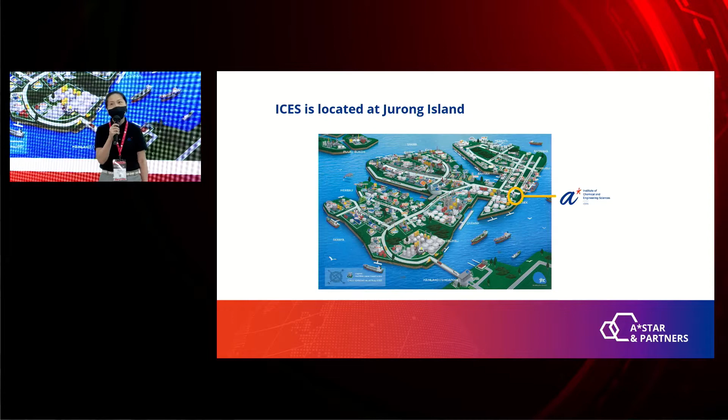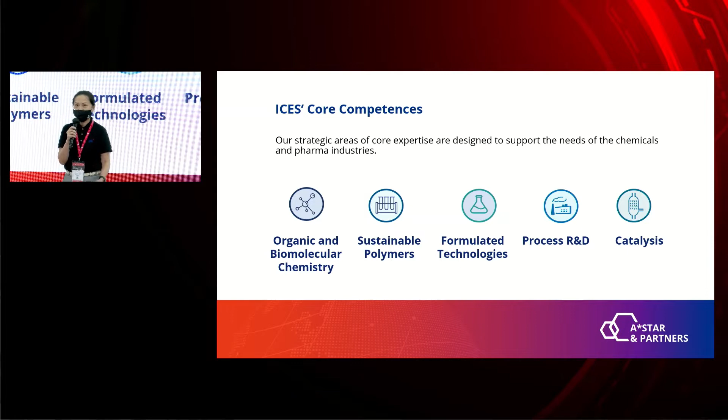With every passing year, scientists become more certain that global warming is behind today's many extreme weather events, and the gas most responsible for warming is carbon dioxide. It can exist in the air for hundreds of years, and it may keep affecting the climate up to 1,000 years once it has been emitted.

However, although carbon dioxide is a significant contributor to climate change, a growing interest in a potential carbon economy is growing from governments, industries, and investment communities. So carbon capture and utilization technology is key to helping us meet climate and economy goals.

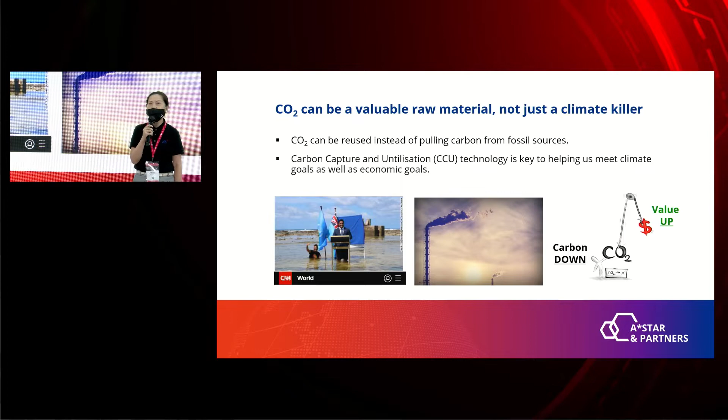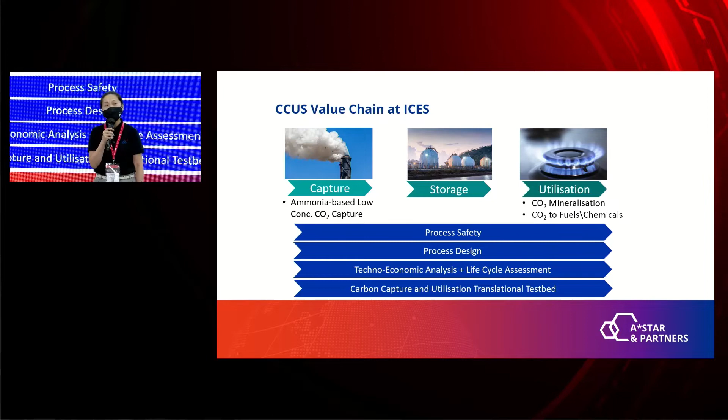ICES has been active in supporting our national decarbonization effort by initiating research programs and projects in collaboration with industry and universities on CCU technologies. We mainly focus on capture and utilization, and we have other research capabilities to support these efforts.

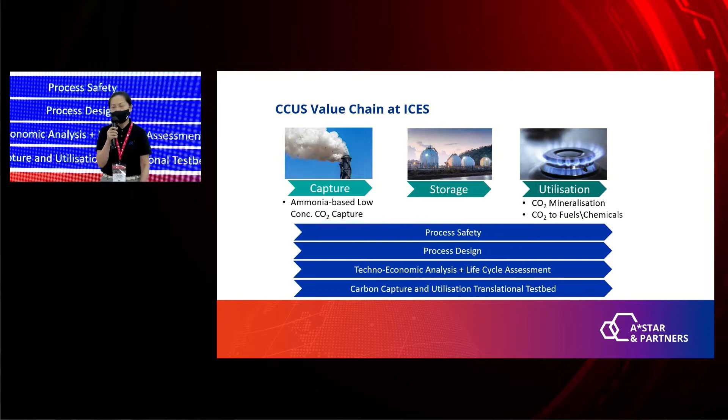Today, we are going to show 3 key research areas in our institute: carbon dioxide mineralization, CO2 to fuels and chemicals, and CCUTT.

As we know, being an island country, Singapore is also facing the threat of sea level rising. 30% of our land will be below sea level by 2300 if the global carbon dioxide emission reduction target cannot be met. Therefore, we need a lot of sand to do our coastal protection.

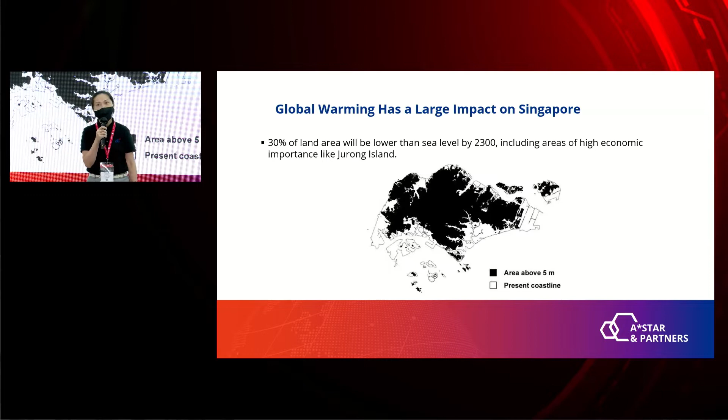Carbon dioxide mineralization is a technology very relevant to our context. In this CO2 mineralization process, the captured carbon dioxide is reacted with alkali earth materials such as calcium or magnesium to form metal carbonate, such as calcium carbonate and magnesium carbonate aggregate.

The carbon dioxide mineralization technology will help decarbonize the power and industrial sector. In addition, it can create alternative sands for many applications. It will increase our self-sufficiency and resilience in nation building by reducing the reliance on sand imports.

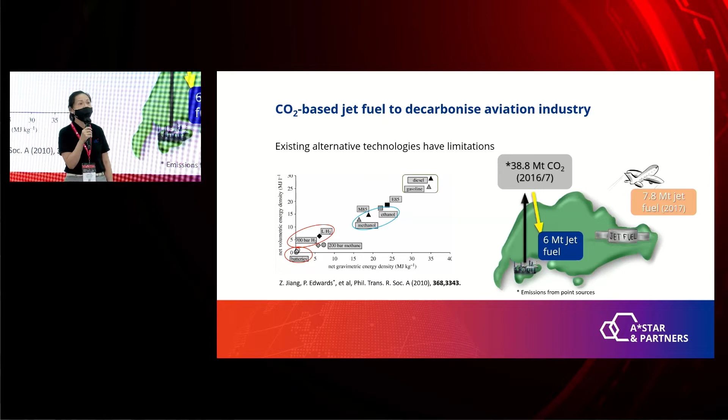Carbon dioxide can actually be made into jet fuel. This type of carbon dioxide-based jet fuel is potentially a carbon-neutral aviation fuel to help decarbonize this industry. At ICES, we have developed efficient catalysts to convert this waste carbon dioxide into jet fuel.

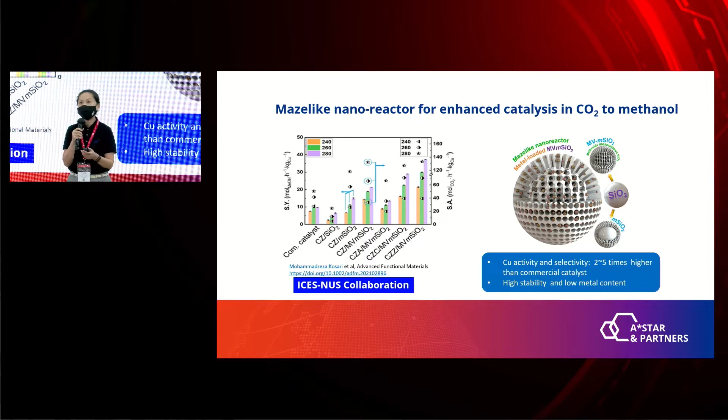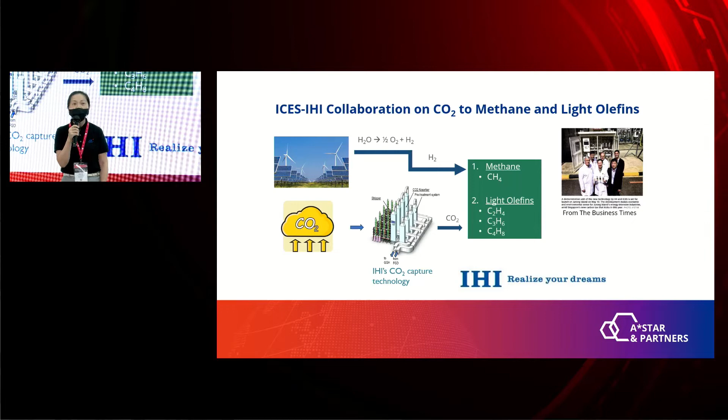Let me come to the conclusion. At ICES, we are working on carbon dioxide capture and utilization technologies to fight climate change. We offer a variety of collaboration models to meet different needs of industry. Please contact us to find out how we can work together with you for your sustainability development. Thank you for your kind attention.

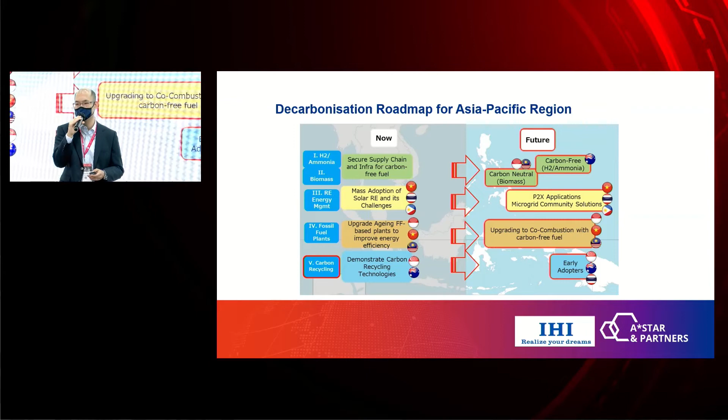From the point of view of the Asia Pacific region, I'd like to focus on this slide to explain what IHI does. For the first one, hydrogen and ammonia, I think there are a lot of business chances and possibilities in the AP region, since many supply chains and infrastructure for fossil fuel already exist. So we are working in this field to adopt newer, greener fuels such as hydrogen and ammonia, which can also be applied for biomass. And for energy management, renewable energy and similar areas, the AP region is a very growing area. Needless to say, there are a lot of business chances available here.

And then number 4, of course, for some of the fossil fuel power plants, there should be business chances for adapting new kinds of technologies, and customer demands are there. We are working on upgrading the facilities or some co-combustion or something like that. Not only ammonia and hydrogen, we can consider carbon-free fuel here as well.

But today's main focus is carbon recycling, where we can work with ICES and A-Star. This is now the stage to find the very early adopters. I believe thanks to some movements, such as COP26, there should be more and more potential customers for this kind of area.

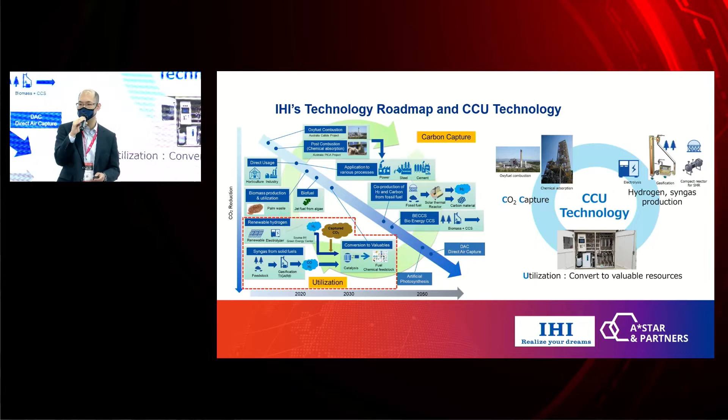So put simply, IHI can have an opportunity, the capability for CO2 capturing. Also, we have the hydrogen or syngas related technology. And furthermore, we can enhance and strengthen some technology to convert this CO2 and hydrogen into valuable resources. So I'd like to talk a little bit more about this part.

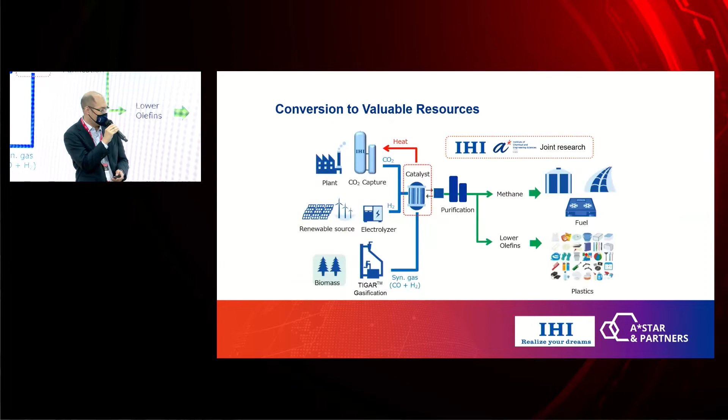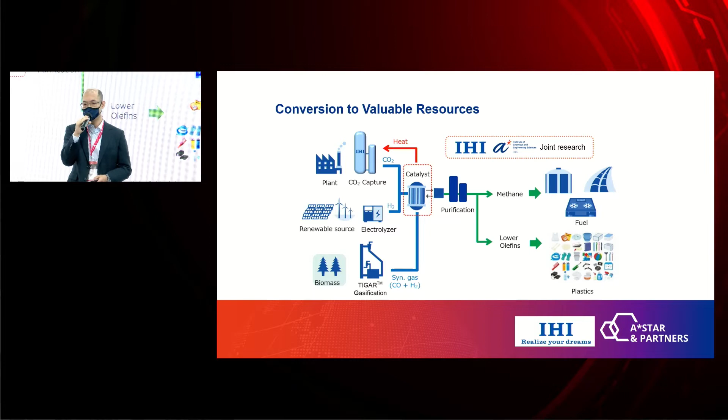So as I said, we already have the technology that can capture CO2 and purify it. And furthermore, we have some technologies related to green hydrogen, and also for some potential hydrogen sources, such as gasified syngas. Then how do we bridge this CO2 and hydrogen into some of the valuables?

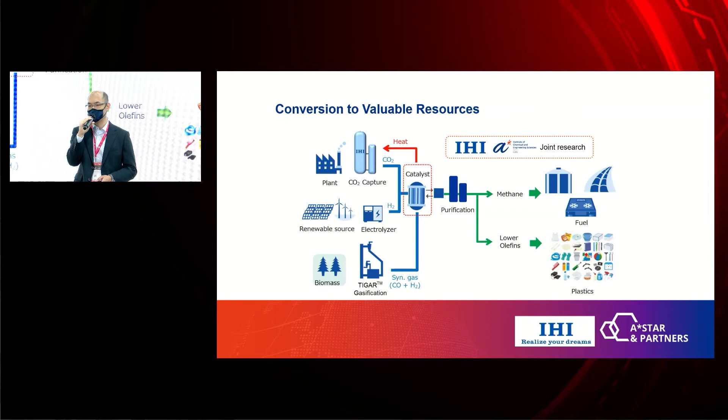So this is the technology. We are working with ICES and A-Star for this joint research. The core technology is the catalyst to convert CO2 and hydrogen into some of the valuables. And we are working on both catalyst development and also reactor development too.

So I would like to explain some background for the first example. This is actually my role here in Singapore, to accelerate this development. It's titled the production of lower olefins to produce plastic sources or something like that.

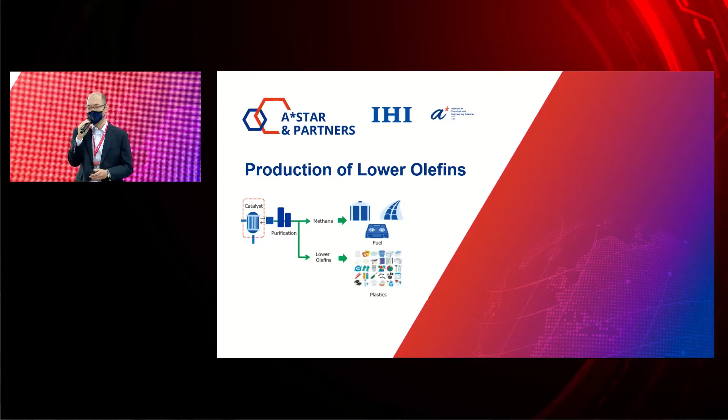So what we need to do for this kind of development, actually the catalyst development itself is really time-consuming, also manpower-consuming, a very resource-consuming process. We need to synthesize the catalyst and then do the characterization. And then after the experiment, we need to find out how much the target products yield. And then we need to feed back such knowledge to new candidates to be tested.

So this kind of cycle is tested for a very, very long time, and also a lot of efforts are necessary.

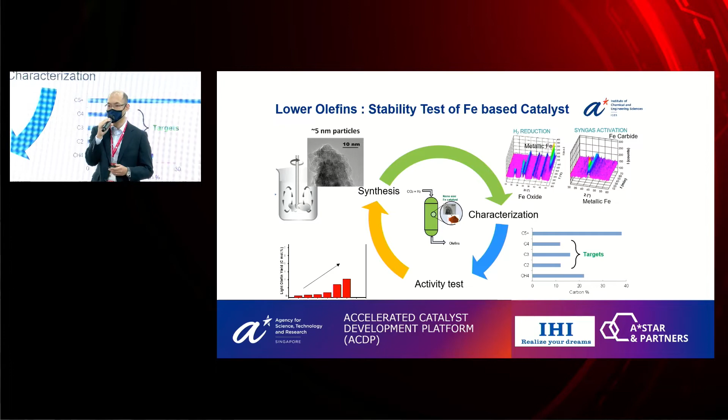So recently, as the latest news, I'd like to announce that we are working on another project, so-called the Accelerated Catalyst Development Platform. This could be supported by the A*STAR program, and IHI is also willing to give them some experimental data to accelerate this development. I hope this kind of new knowledge and technology can help accelerate catalyst development.

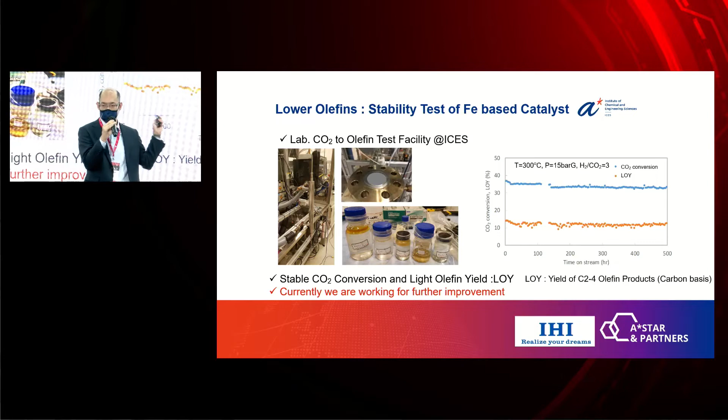As for the reactor development, this is on the left side. You can see the actual picture of the appearance of the experimental facility, and we would like to announce that you can see on the right side, we have stable CO2 conversion and light olefin yield, and we are working on further development. We already found 500 hours of stability, and now we are working even more.

This is the last slide for the lower olefins example, showing the latest press release from IHI Japan. So how do we move forward with this olefins development? To be honest, this technology can be applied in real petrochemical plants.

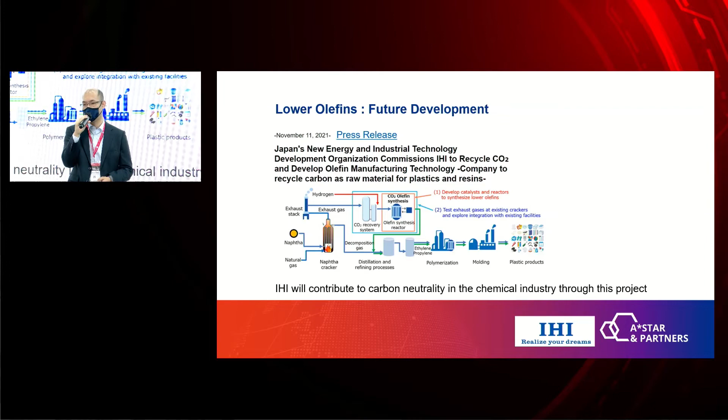Recently we successfully collaborated with the Japanese New Energy and Industrial Technology Development Organization, NEDO, to fund this technology and demonstrate it at an even bigger, real technology site. More information is available in this official press release, so please check it out. Anyway, IHI will contribute to carbon neutrality for the chemical industry from now on.

For the roadmap, after studying at a very small laboratory scale, we successfully launched the demonstration unit in Singapore, shown in the middle. Although it has a similar production capacity, this demo unit is equipped with a water electrolyzer.

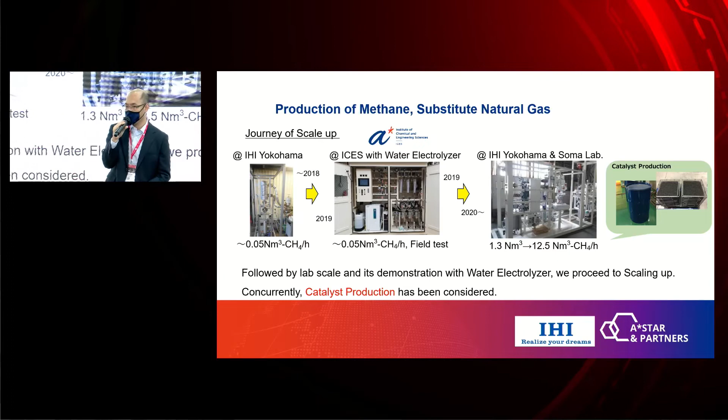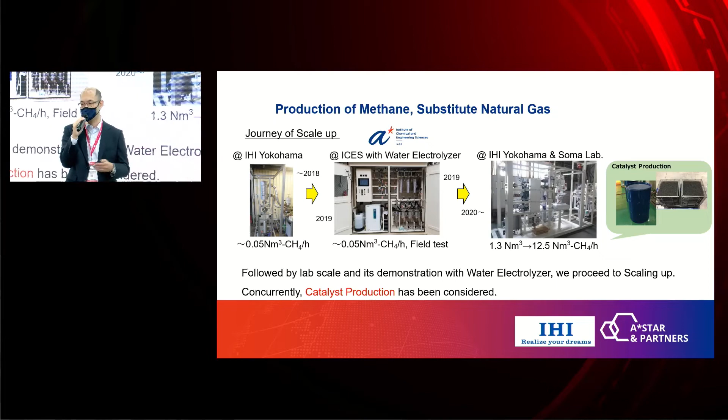After that, at the IHI Yokohama site and Soma Lab, which I'll introduce later, we successfully moved forward with scaling up this technology. One important thing is that not only are we developing the reactor, we are also working on catalyst production, producing a bigger capacity of catalyst to synthesize and apply.

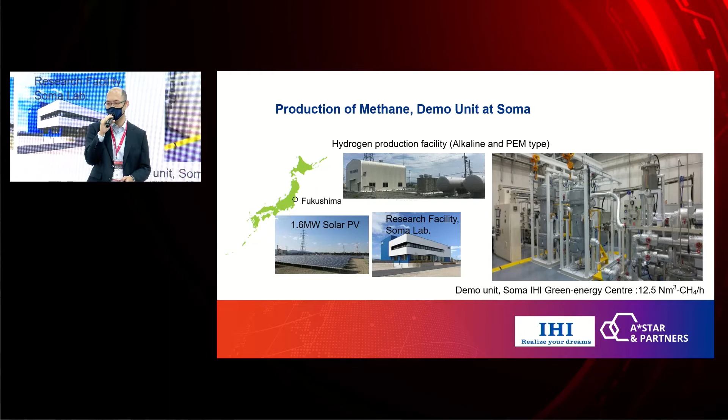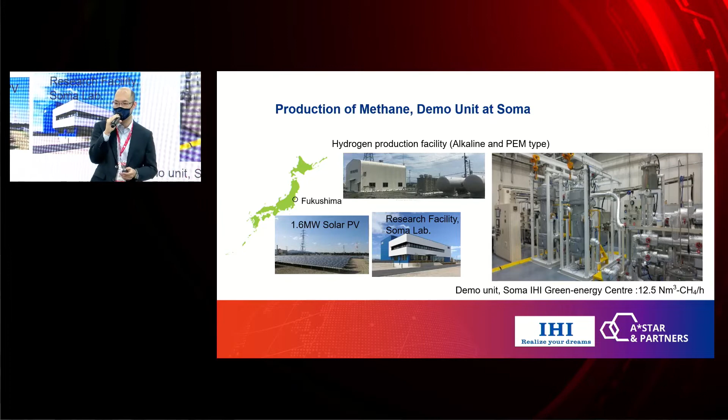This is the latest and biggest demo unit for methanation technology, located in Fukushima prefecture. We can show you the plant equipped with solar PV and a research facility, along with electrolyzers of both alkaline and PEM type. This is the appearance of the biggest research facility for the methanation plant.

So this is the key takeaway for all of the audience. We are working with ICES and A*STAR, but beforehand, we are the company that tackles the decarbonization issue. Carbon recycling is the most essential part to achieving this carbon-free society. Working with A*STAR and ICES, we have two existing projects, lower olefins and methane, as the focusing areas.

Furthermore, I would like to show the expectations for the CCU Translational Testbed, to be presented by Mr. Gabriel Loh. We wish this would be a great opportunity to demonstrate things in a faster and smoother way, achieving this wonderful carbon-free society as soon as possible. That's all. Thank you.

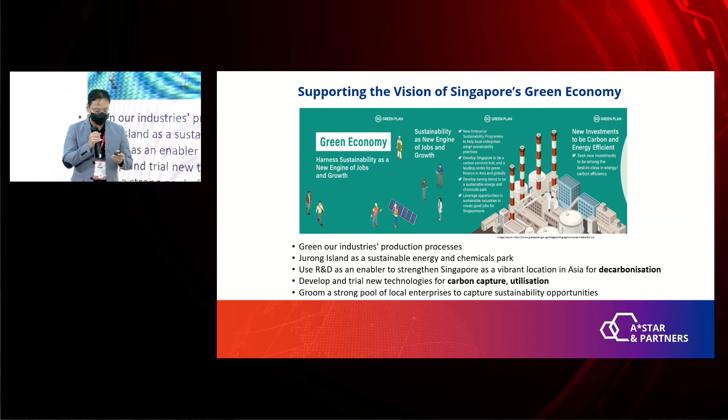As such, companies are very selective in terms of the technology they choose to translate. So where we position CCU-TT is really after early stage research TRL space, but before industrial piloting and industrial adoption. This is really to break down the barriers towards translation and help technologies push up the TRL ladder.

So the question we ask ourselves is, how can we transform the speed of process development, and not just look at the conventional way where dedicated test beds are designed and built? And move away from this conventional approach towards a future state where process development could be faster, much more flexible, much more efficient, and in the process, reduce or be more cost-effective, and ultimately help accelerate emerging technology translation.

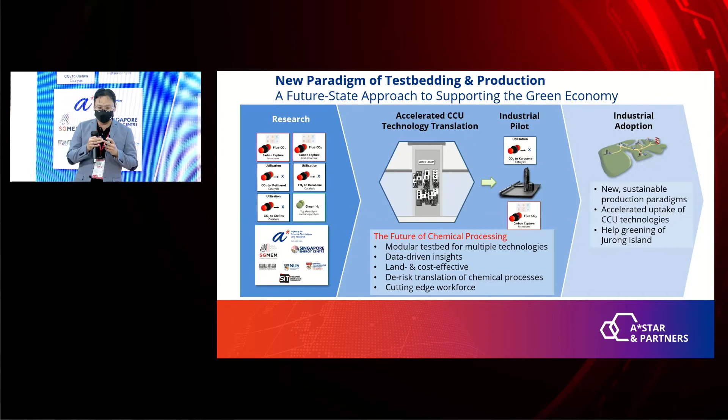So our response to this is really a first of its kind modular approach. Everyone might be familiar with the Lego concept, where simple building blocks are put together to construct a bigger megastructure. In this case, we are doing something very similar. We are trying to encapsulate process equipment into a modular form whereby we could rapidly assemble a testing line.

And with that, we are able to bring in different technologies from laboratory, be it carbon capture technologies like membrane, solid adsorption or adsorbent, as well as solvent absorbents, and of course catalysts which convert CO2 to different chemicals and fuels, into this infrastructure where we could rapidly scale up the technologies and push them down towards adoption as well as commercialization.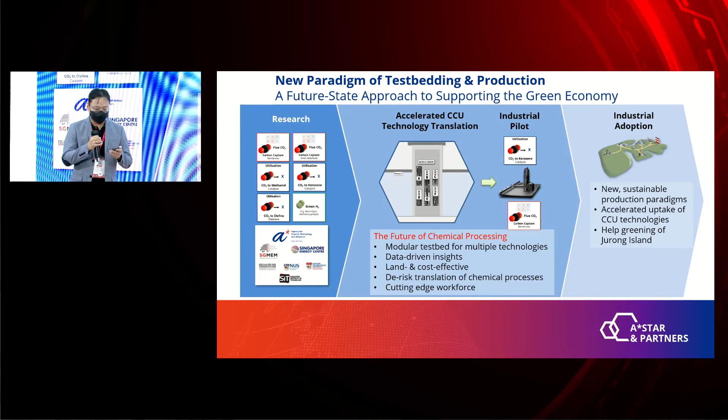So ICE's approach towards this consists of two components. I mentioned earlier the modularization bit. Where we differ from others is really how we take on a multi-level modularization approach, to give us maximum flexibility to configure and adapt a test bed to bring in different technologies into this space.

And this is also enabled by a new modular automation technology, a sort of module type package, which allows a plug-and-play concept. So essentially, through this combination of modularization, we are able to configure and adapt a plant and operationalize it on demand.

The other aspect is the digitalization bit. What we seek to do in this initiative is to have an integrated digital twin, which includes the three key digital twins of the process industry. First, the plant structure model. The second is our operation model, which essentially is our automation, because it gives us all the data, measurements, set points, and so on.

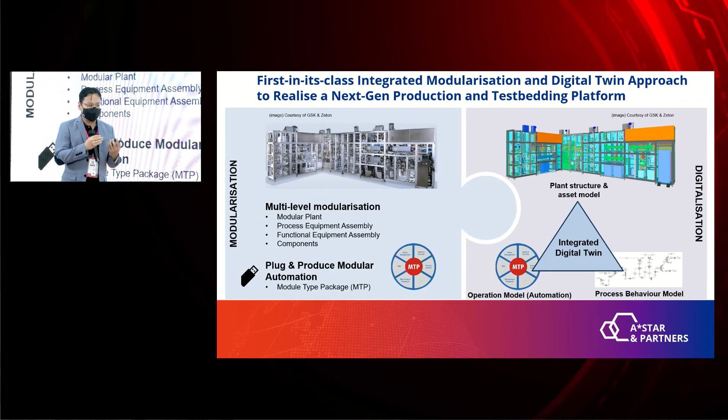And this, again, will be defined by MTP. And the last digital twin is our process behavior model, and this is essentially defined by our simulation. Collectively, this integrated digital twin will be developed and established along the whole life cycle of the assets and during piloting. This will enable us maximum efficiency in terms of decision making, and help us to accelerate the engineering and operationalization of a test bed.

So with this, we seek to actually establish a new production platform, which aims to give us unprecedented speed, agility, cost efficiency, as well as efficiency in operation, to accelerate technology translation.

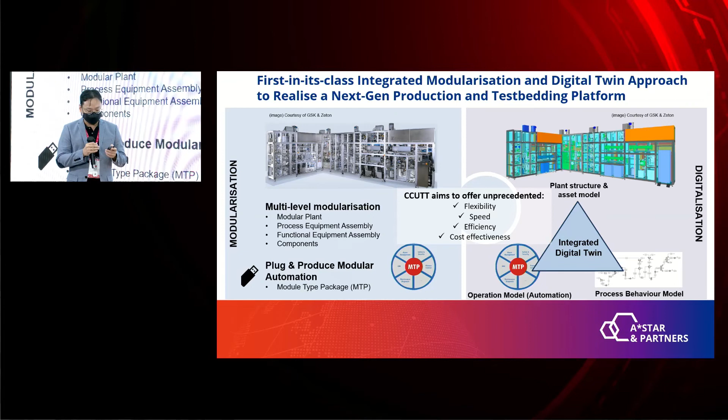So a new production system demands a new methodology, a new way to do test bedding and chemical production. In this slide, it highlights the four key steps which allow us to do so. First, laboratory data and information of these new emerging CCU technologies will be received by a process engineer who shall use it to design the manufacturing of a production process.

And together with the digital twin of CCU-TT's module, we will be able to match suitable modules that will perform each of the steps of the process. With that, we're able to quickly assemble a test bed and operationalize it on demand. And at the end of the scale-up campaign, we will be dismantling the test bed and returning the individual modules back to our module library, to get them ready for the next campaign.

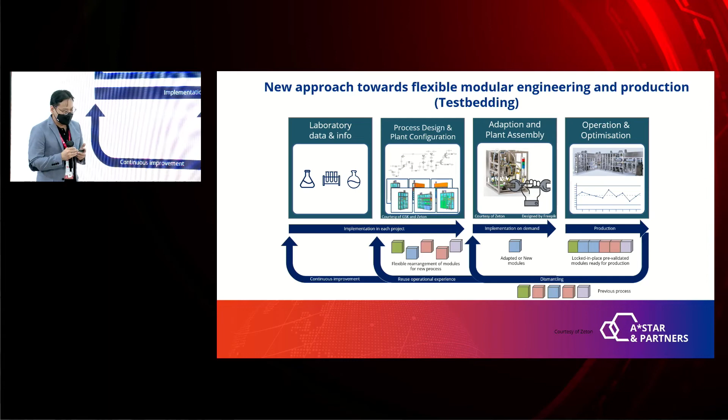So in the next few slides, it will illustrate a bit more about how the individual steps of this methodology work, and give some insights and context to how we are going to perform accelerated test bedding.

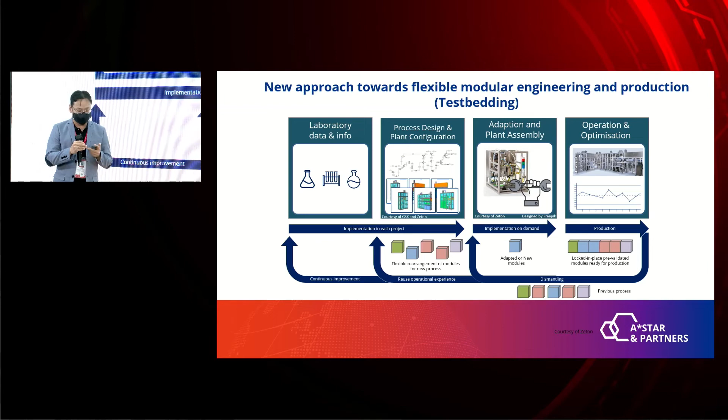So, like I mentioned earlier on, the technology development starts from the lab. Scientists and engineers convene in the lab to develop or invent new materials for carbon capture and carbon utilization. And the data that is being generated from the lab goes to a process engineer, who will take them to design a suitable production process which mirrors that of when it's going to be adopted at the final scale.

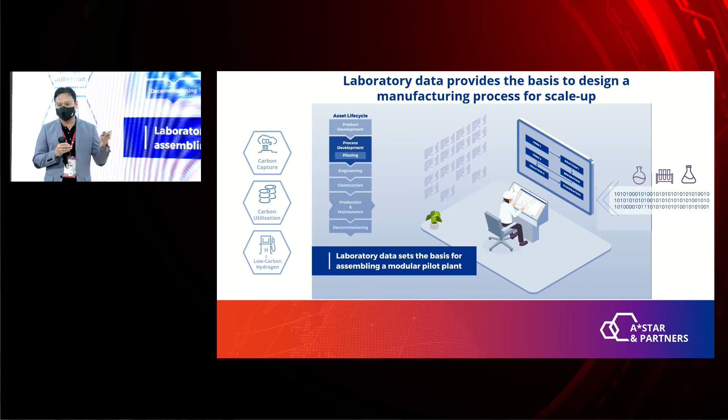And of course, the process will allow us to evaluate the technology in detail to give insights into its performance. And this helps to define the requirements of every step in the process, which is essential because now the engineer will go to the module library and start to pick the suitable modules which will carry out and perform the duties of each of the steps of the process. And the module library could include feed or material feed modules, reaction modules, separation, as well as purification modules.

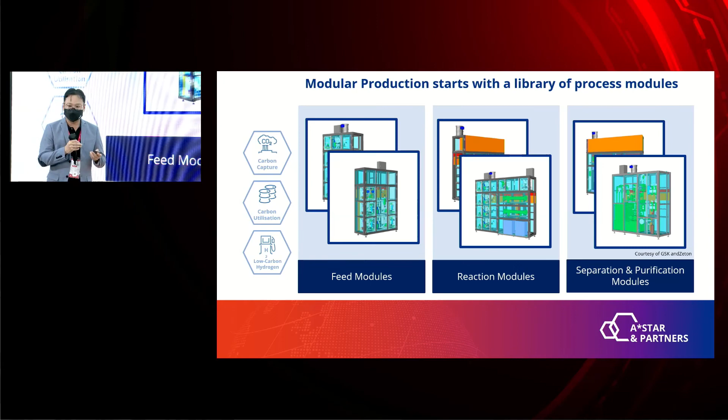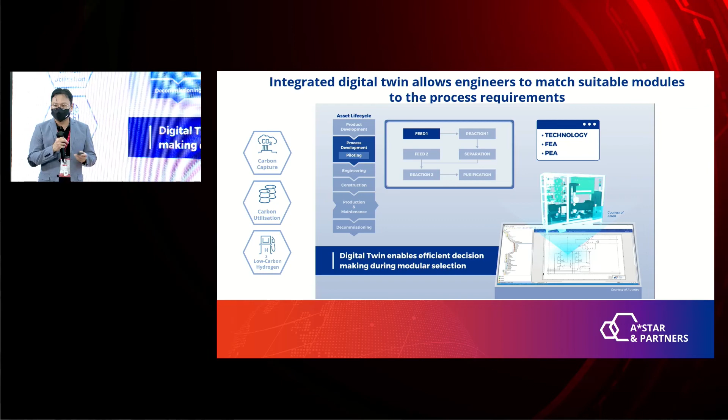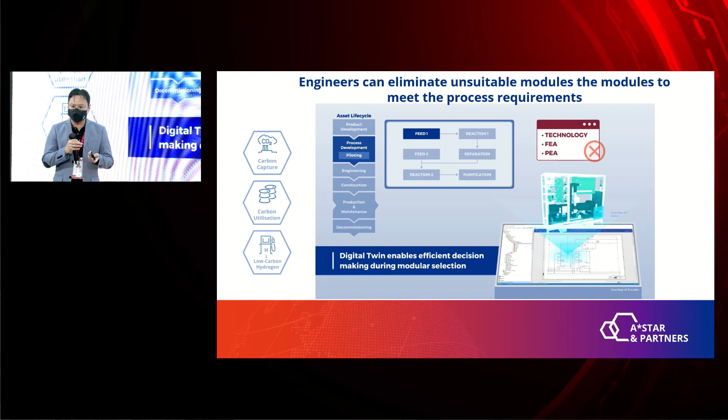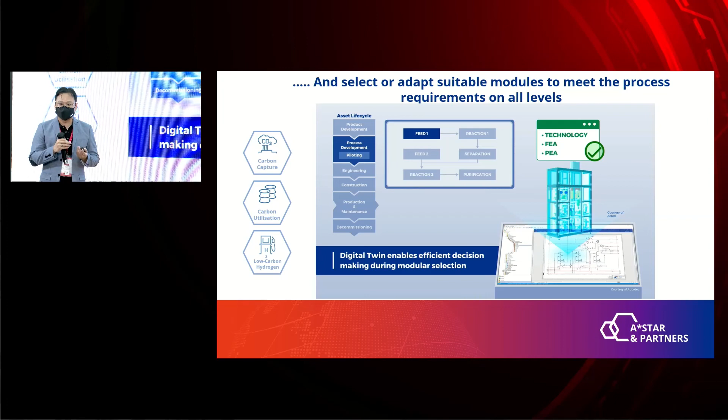What comes next is actually a matching step. The engineer will look at the digital twin and start comparing the characteristics and functionalities of the modules to the requirements of each step of the process, looking at suitable modules. Modules which are unable to meet the requirements of those steps in the process will be eliminated. Those that are able to meet the requirements are shortlisted. This process is iterated through the different steps, and finally you get a suite of modules which will be quickly assembled for test bedding.

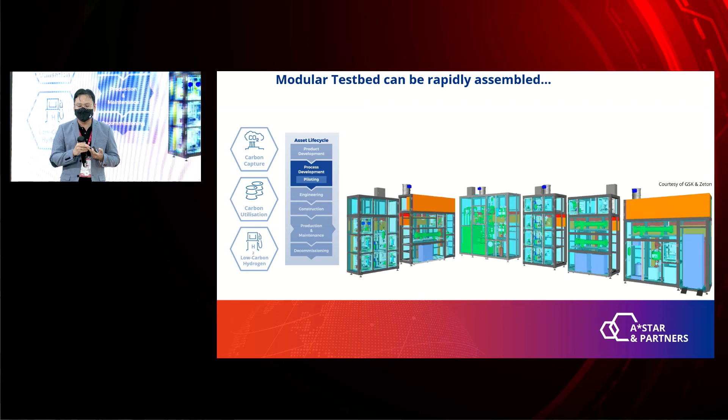So our modules will be designed such that they will be highly mobile or transportable. So you move them into a space. The modular approach is quickly assembled and automated using MTP. And in this way, we are able to quickly form a test bed that helps to stress test the emerging CCU technologies coming on from the lab.

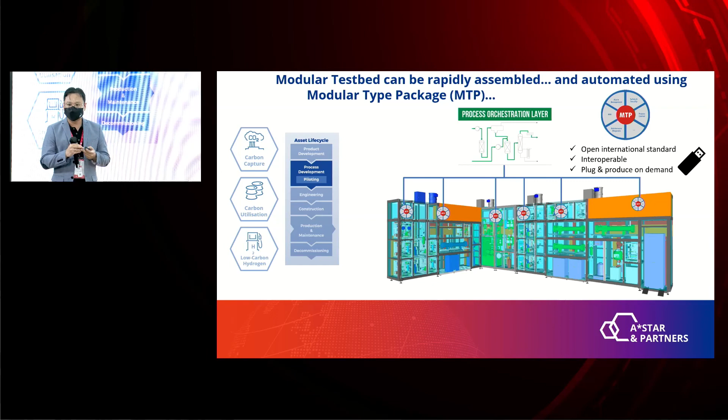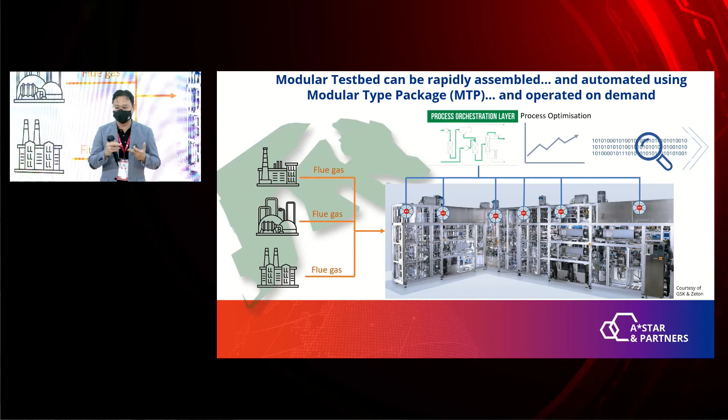And not only this, we are seeking to get flue gas from the different stations at Jurong Island, to be used as a feedstock for test bedding of the CCU technologies. What we seek to do is create an environment whereby the technologies would be stress tested under realistic industrial conditions, dimensions, and using industrial feedstocks. This is really to create confidence in the data and insights being generated during scale-up.

Which is essential because they form the basis of a sound business case. So CCUTT hopes to accelerate the assembly of a test bed, create the environment to give quality data, to support and de-risk business decisions for next steps of industrial piloting.

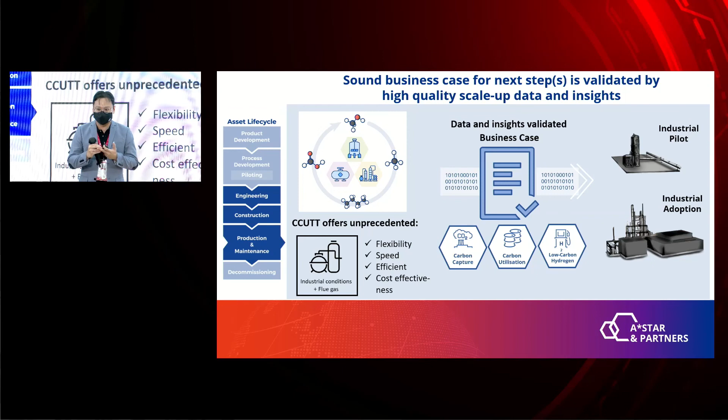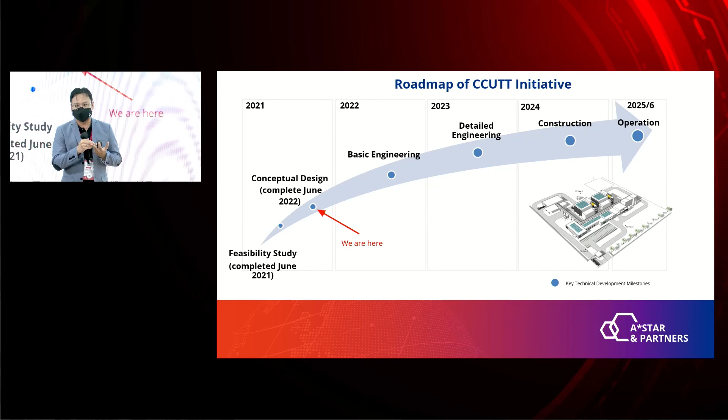So where we are right now in the CCUTT initiative is at conceptual design phase. We have taken a front-end loading approach for the project, whereby through systematic stages and phases of the project to align both business and technical requirements, we hope to put the facility and infrastructure on Jurong Island sometime in 2025.

So in short and in summary, CCUTT seeks to accelerate decarbonization of the process and chemical industry in Singapore through three key approaches. First, having a highly flexible and rapid infrastructure and modules to help scale up emerging CCU technologies. Second is to create an environment where we stress test these emerging CCU technologies under realistic industrial conditions, dimensions, and using industrial feedstock. This is really to create confidence in the data and insights to support and de-risk business decisions for the next steps.

And last but not least, we hope to see an ecosystem, like the one you just witnessed earlier on, the signing of the MOU for different companies and research performers, being supported by the public agencies to collectively drive these national imperatives. So with that, ICES is seeking out companies who are able to join us and impact this national imperative towards a low carbon economy.